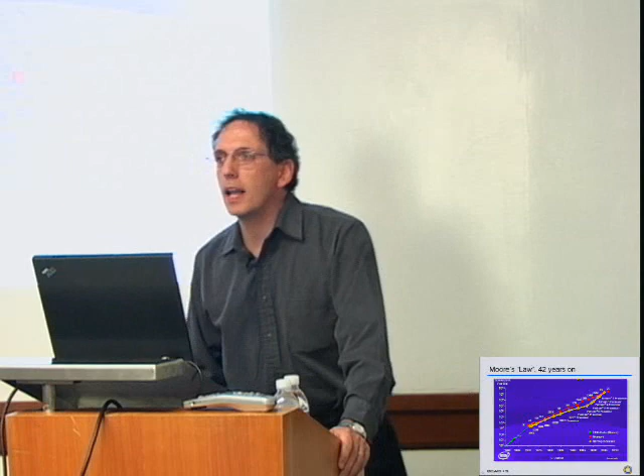And 5 years later, Moore from Intel looked back at these 5 green dots and said, hey, there is a law at play here. Things are really improving on a scale, so let's establish that. Remarkably, even though nobody is actually forcing or following this law, the industry followed pretty much that. And now we have cases where we have exceeded 1 billion transistors on a chip. This has been going on for more than 40 years.

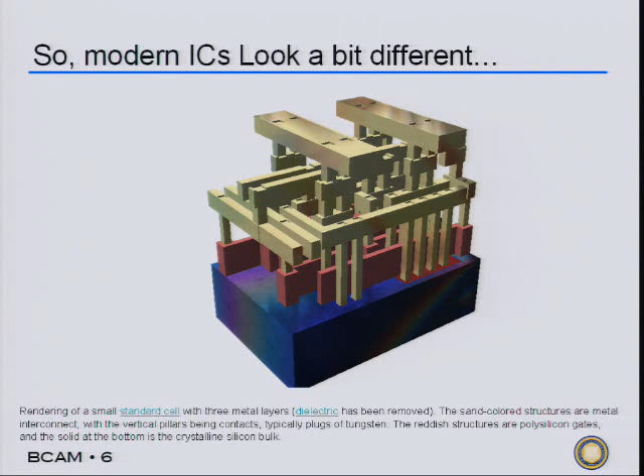And chips and integrated circuits look a little bit different than they used to look back in 1964. This is a standard cell. It shows some of the complexities you could face. You see the silicon substrate at the bottom, the transistor gates—there are many transistors here, maybe 20 or so. You see the contact holes, you see the interconnect, and some material has been removed in order to make this visible.

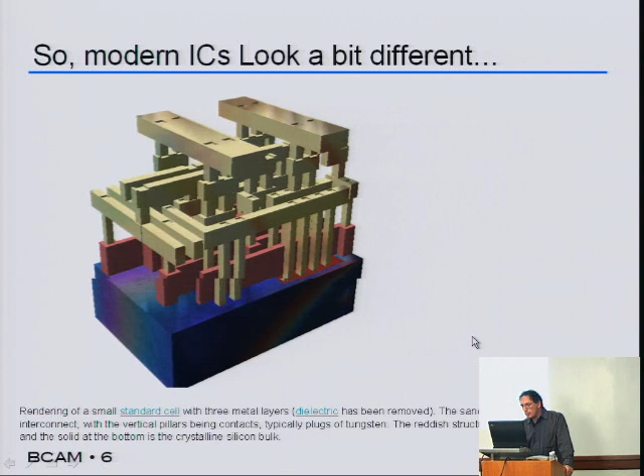If you indulge me, a comparison between what it is and what it was is kind of instructive, and I wanted to put them on the same scale. To do that you would have to grossly magnify what Kilby did 40 years ago. Let me make the generous assumption that this wire is 1/10 of a millimeter, maybe it was bigger at the time, so 100 microns. I will still have to magnify it because this little dot here, that perhaps you cannot see, represents the circuit. If I magnify it a little bit, maybe you can see it better. So you can see things have progressed tremendously.

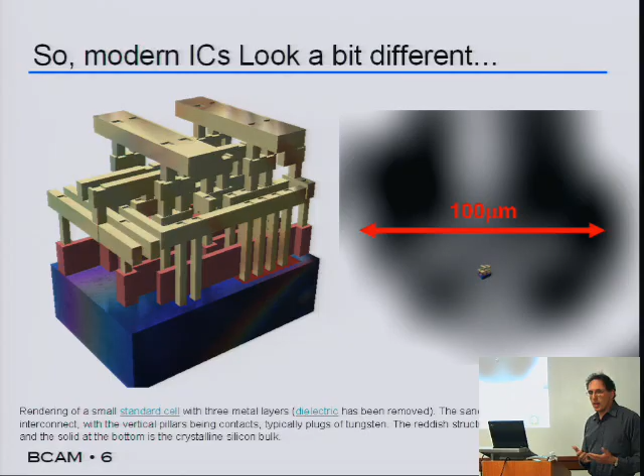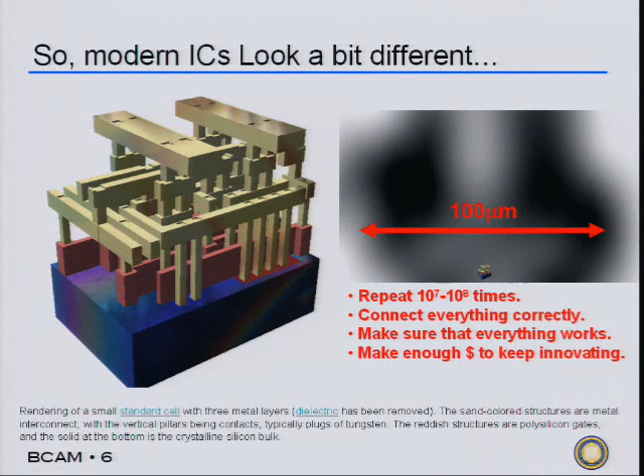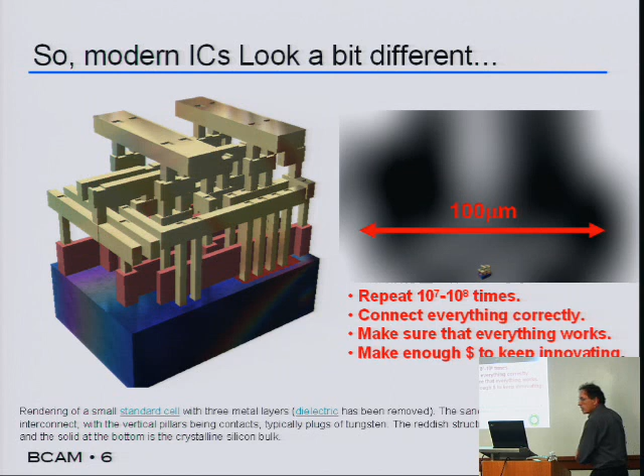And there are some challenges with that, because the moment you decrease the size of something to this, the real challenge begins. Remember that a real integrated circuit has 1 billion transistors, so you have to repeat this thing 100 million times, and make it flawlessly and connect it without any problems. Make sure everything works, and on top of it, you have to sell it for a few dollars and still make enough profit to invest in order to keep pushing the technology. To say that it is not easy is an understatement, but it has been happening with great regularity.

So in summary, if you go to past and present, the semiconductor industry follows different eras. In the beginning, in the 1960s, it was the novelty of the concept and the main patents and ideas that came about. Then people figured out a way to do it more effectively, so that was a technology revolution in the 1970s when they dropped the cost and consumer goods started coming out. At that time, they hit a wall because now you had an opportunity to design circuits with hundreds of thousands of transistors, so the design techniques had to change.

Design automation was necessary, so the design revolution happened in the 1980s or so, where most of these things became software products of industrial strength. Then, in the 1990s, people figured out how to really improve the efficiency of manufacturing.

They put controls in manufacturing, statistics, models and diagnostics, so manufacturing became very effective and costs continued to drop. Now we are in the 2000s, and people are looking for the next opportunity, what is next to push. This is what I would like to talk about. But the bottom line is that we cannot keep progressing by making things smaller anymore. You can do this for a little bit longer, but there are fundamental limits that we are approaching, and also economical limits.

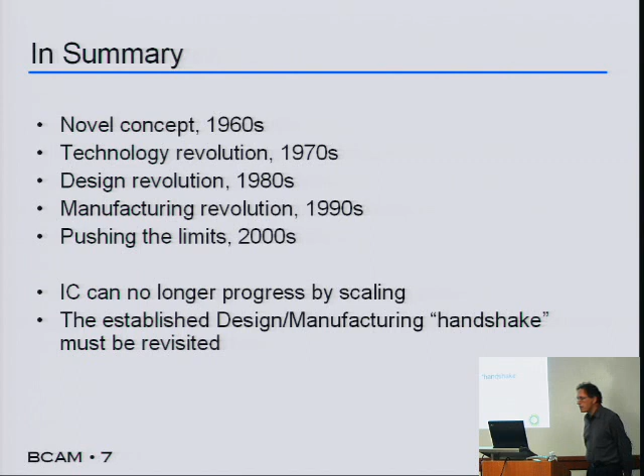The other thing is that the established design manufacturing handshake needs to be revised. So with that, I would like now to go a little bit deeper and tell you about this handshake, how it is today and how it has evolved over time. I will talk a little bit about the design automation and the design flow paradigm.

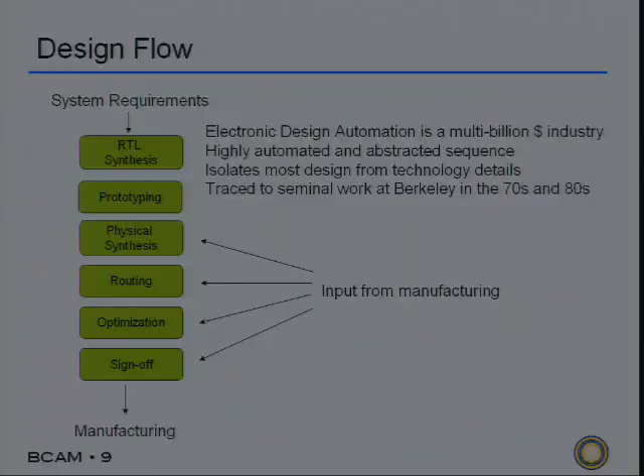The design flow essentially refers to the sequence of events that need to take place from the moment you get the requirements for a complicated integrated circuit product until you actually build it. The design flow has been highly automated thanks to the EDA industry, the electronic design automation industry. It's a multi-billion-dollar industry, mostly in the South Bay.

The emphasis of this is to highly abstract things, so people who design integrated circuits do not need to know much about the technology, because you need many more designers than people who build them. So people can push polygons, draw lines, and somebody else takes care of all the technological problems behind it. So there's a high level of abstraction, isolating most design from technology details.

And of course, it needs to be said that the whole electronic design automation revolution owes its genesis to UC Berkeley, to seminal work that happened here in the 1970s and 80s. People like Richard Newton, of course, played a huge role, and others.

You see the sequence here. You start with a very high level of abstraction, describing a microprocessor or a video driver. Then you synthesize this at a fairly high level of abstraction in what is known as register transfer level.

Then there is some prototyping. Now, don't fool yourself, this is not physical prototyping, it's still in the realm of simulation. Then there is the physical synthesis, where people start designing the shapes that are going to be printed. There is the routing, when things are connected together. Then there is optimization, and finally you create masks and give them to manufacturing.

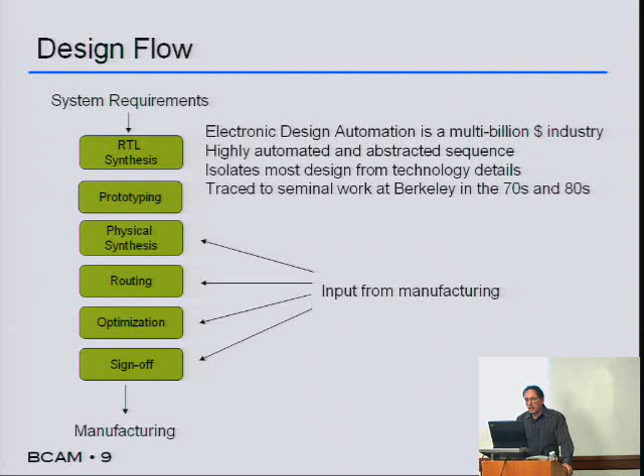And of course, in at least these last four steps, you have to have input from manufacturing to tell you what is possible to do. The form of this input is highly abstracted, and I would like to talk about that.

But I would like to tell you that there are fundamentally three communities in this transaction: the people who design the integrated circuits, the people who develop the new technologies and chemistries to actually make them, and the people who will actually have to make this in volume. So there is design, technology or process development, and manufacturing. Design and process development interact very closely in many cases, but at some point, things have to go down to manufacturing.

This was very ad hoc until the late 1970s, when a book came about: Introduction to VLSI Systems by Mead and Conway. Maybe you're too young to have seen it, but it's still on my desk, well worn out. This book introduced the concept of design rules.

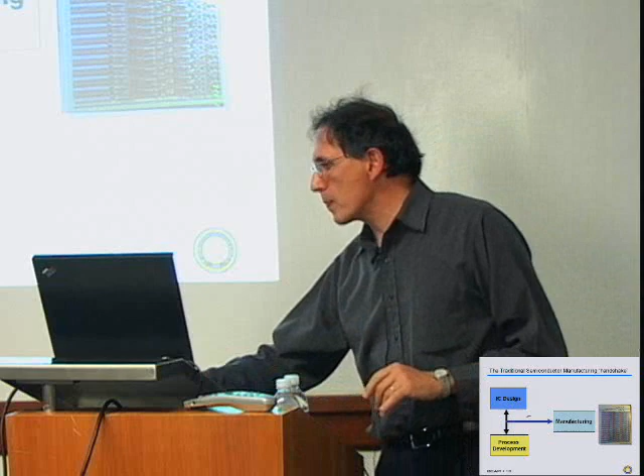Essentially, what it says is that perhaps the way to let designers know when something is feasible or not is to simplify it as much as possible and give them some basic dimensions they have to observe. If you observe these dimensions, we, the manufacturer, guarantee that the thing is going to be realizable. So all you have to worry about is making sure that electrically the thing is correct, and that you observe the fundamental dimensions, and it will be okay. These are known as the Mead and Conway design rules. It's a very simple concept.

If you're designing, if you as an electrical designer want to connect your aluminum layer, this is a cross-section, to some kind of a substrate, you have to cut a hole into the insulator and let the aluminum flow down. From the top, it looks like a hole cut on top of this resistive region.

So the design rules will tell you that if you want us to make this, make sure that you observe some minimum distances. Make sure that you do not get this contact hole too close to the edge, because there might be problems. There are uncertainties in production. And make sure you don't make this contact hole too small.

Notice that the term lambda shows up here. The reason people use this term lambda is because design rules are meant to be scalable. So I have a set of design rules, and I'll tell you that lambda is 1 micron. Tomorrow, if my process is better, then I'll tell you, it's the same design rules, but lambda now is 0.5 micron. So automatically, you can scale your design down. Everything is scaled into this lambda.

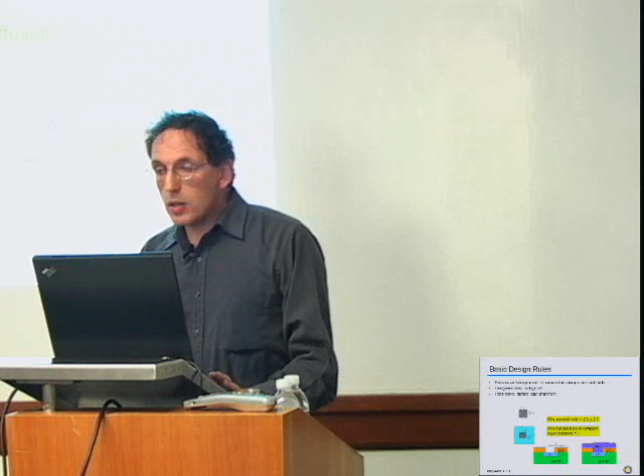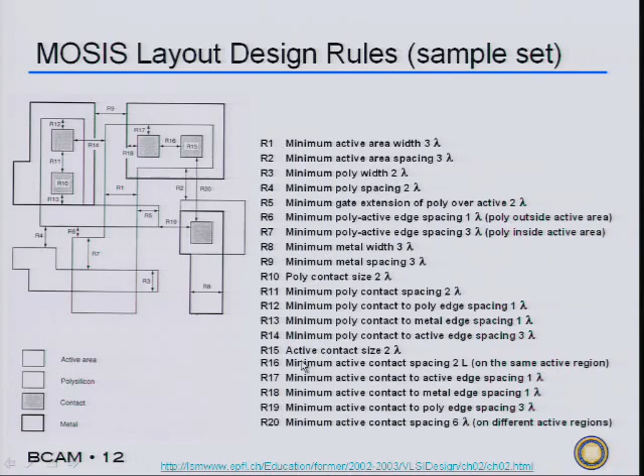The people who develop the design rules try to capture all the possible contingencies here on how these layers interact, and they generate a rule for each one of these contingencies. So notice that a simple interaction of a few layers generates a large number of rules. Now, all of them are scaled to lambda, and they can easily change.

But as the technologies advance, the number of rules you have to deal with has grown a lot. In a real process, you have to deal with a few thousand rules, and the rule book is as thick as a telephone book. And there are some other problems. As we move ahead, this top-down view of the design, where if you make sure that some distances are observed you're going to be OK, doesn't really describe the complexity. And some of this complexity now can come back and hurt the designer.

This is a cross-section of a relatively modern device. The source is from Intel. It is a 65 nanometer device, or a device at a 65 nanometer node. Node is a term the industry uses as they progress in scaling, moving from one node to another. As you can see in this cross-section, these little dots happen to be silicon atoms, and here, silicon dioxide molecules and silicon atoms underneath. The device size is comparable to the fundamental unit of atomic size.

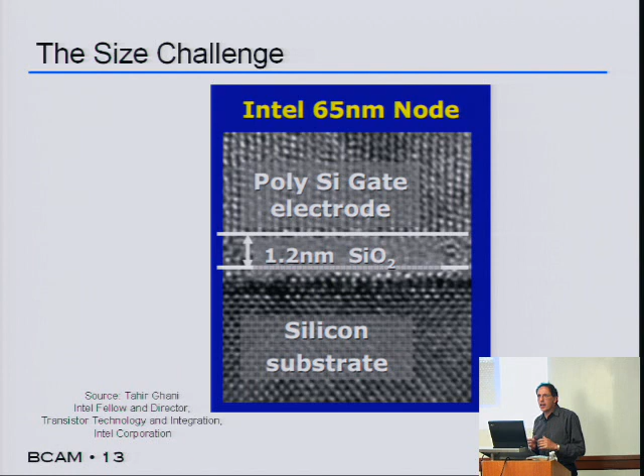So now you have to deal with issues that cannot be simplified so much by presenting simple dimensions. The other problem is that in the good old days, transistors were planar or flat. So a top view of a transistor like this will tell you where the source, the gate, and the drain are, and the channel, because all you could do is move things around from a two-dimensional world—it didn't quite matter to you. That was an abstraction you could live with.

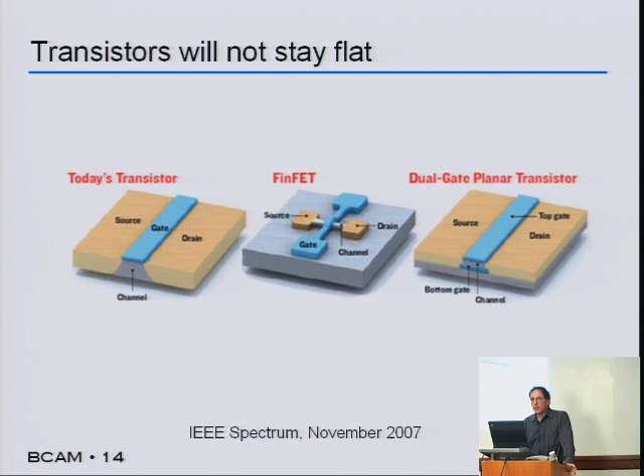Transistors will not stay flat. In fact, transistors have already moved into a situation where you have clear three-dimensional structures. And in some cases, people are talking about transistors where they go underneath the top layer, and you have another layer behind it. So with all these complexities, that's another view on the complexities. The reason I put this picture in is to make the point that a top-down view of a two-dimensional world where you can simply deal with lateral dimensions is not adequate anymore.

This is not a big problem because clearly rules are not being observed manually anymore. You don't design the layout and look it up in a book. You draw the layout, and like an automated spell checker, if you draw something that's not acceptable, it gets highlighted, and in many cases it gives you a suggestion of how to fix it. So that is okay. However, when you have thousands of rules, the performance of that spell checker suffers, so now it gets in the way of doing the design.

But if that was the whole problem, we would leave it alone. Unfortunately, it is not. In generating these thousands of design rules, we cannot guarantee that these rules are unique anymore, so you might have many rules that are redundant. You have a rule about this distance and a rule about this other distance, but in some context one rule might overshadow the other, so you have this inefficiency of having redundant rules.

But the biggest problem is that back in the old days, if you met the rules, your design was guaranteed. Unfortunately, that's no longer the case. So designers are asking, why should I go through all this pain of spell checking my layout, my design, if at the end you cannot guarantee that you can build it for me? What is the point? So there is a discussion between the communities now on how to deal with that.

So I just want to leave you with two messages. Design rules have grown to be very cumbersome, and design rules no longer capture the complexity of the process, so meeting them does not guarantee that things are going to work. So let's talk about that a little bit and how people are dealing with that.

So I would like to talk now about the design rule bottleneck, now that you know what design rules are. The bottleneck revolves around a few issues: variability, or maybe I should say uncertainty, hotspots, which is an interesting term I will define a little bit later, and patterning, that is creating a layout, creating a pattern that is at its theoretical limit. I will explain what that means.

The semiconductor industry is famous for being fairly organized, so they maintain what is known as the semiconductor roadmap. The roadmap is a document that the industry issues together every two years that essentially projects the future of technology. They tell everybody this is what we intend to do in the next 5, 10, 15, 20 years. It has different scales, so the roadmap is a very thick document because it deals with all the details of the technology, and it also explains why these changes are needed. And they use a convention when they project the future.

By the way, this is drawn across time, you see the years here. And there are different features here, different numbers that represent the features of technology. I will just focus your attention on one line.

This tells us that in 2005, the industry expects to be printing metal layers with a resolution of 90 nanometers, 90 billionths of a meter. And we expect that year after year we'll be reducing that, improving the resolution to 78, to 68, all the way to 32. Now, the industry uses the convention of using white when the solution is known, when we know how to do that, yellow when we have some ideas on how to do that, and red when we have no clue how to do that.

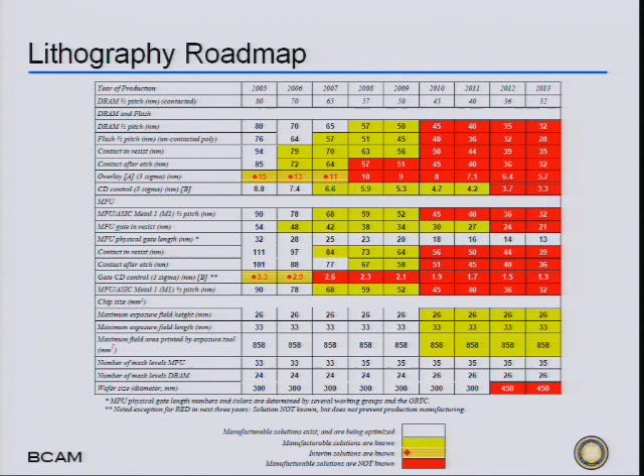So by taking a look, you see when the next problem is going to hit you. And you can see that, well, when it comes to controlling this thing with small variability, we are already in very shaky ground. And today, that roadmap is a year old. Today, we're in trouble, we don't know how to meet our goal. But anyway, this is what the industry tries to do. They try to map out everything very neatly, but there's quite a bit of a mess behind it trying to achieve it.

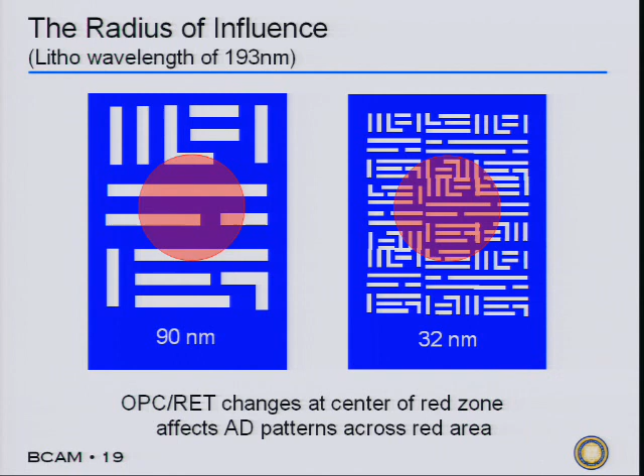I would like to focus on two numbers here: the objective that in 2005 the industry was printing things at 90 nanometers, and in 2013 we'll be doing things at 32 nanometers. That has a big implication. This is a kind of caricature of a layout, a 90 nanometer layout, and the same patterns are pretty much shrunk down to 32 nanometers, so they are smaller. Clearly you can see why the industry wants to do that—you can fit more stuff on the same area, more functionality, more transistors, and so on.

Imagine you're drawing this with a pen, the tip of the pen has the same thickness it's had before. The tip of the pen in this case is the wavelength of light that you use to print things, and this wavelength causes imperfections in the printing process, in the patterning process.

This circle essentially shows the radius of influence: if you change the layout anywhere within the circle, that change will impact the layout in the middle. So there is an interaction now. If you put another line there, the layout in the middle will change a little bit because things interact through the electromagnetic field while you're printing them down.

Now if you go to 32 nanometer, the radius of influence is the same, but now you have much more stuff in it. So you have much more stuff to worry about, many more interactions to worry about.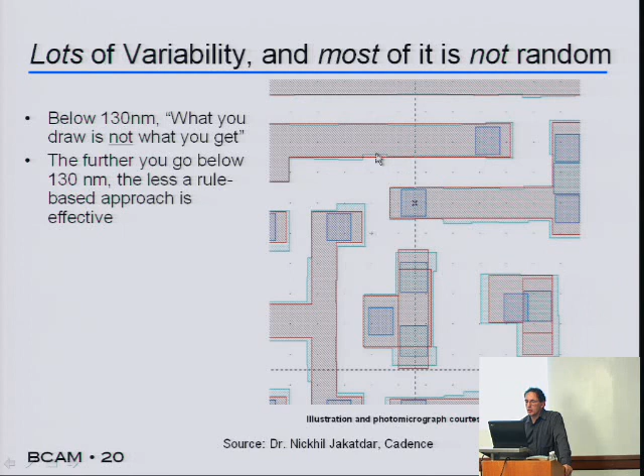Then some kind of automated software took this layout and changed it a little bit, made little changes in order to compensate for imperfections in the printing process. And then finally, one fine day you print it and see how it looks like. And this is a good result.

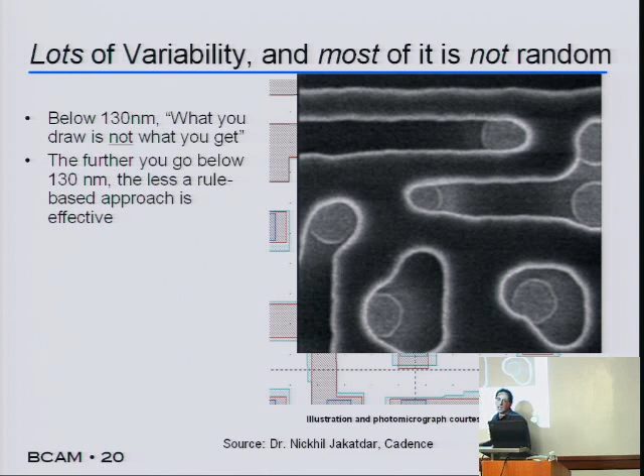The reason this is a good result is because nothing shorted out. All the contact holes that were square, by the way, now they are round. You cannot resolve the corners. But all the contact holes are in the right place, so this thing would electrically work. Now, there is such a difference between the simplistic view of the designer and the reality of making this thing that is giving us all the headaches.

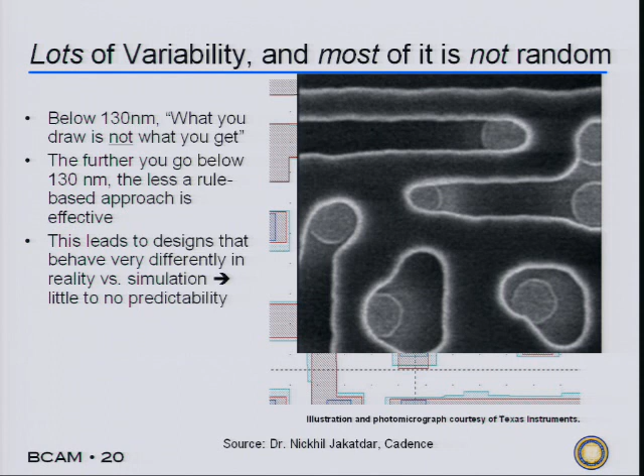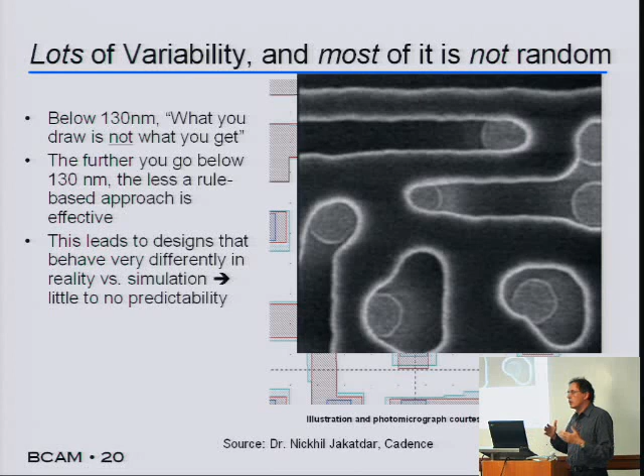So even though electrically this thing would work, its performance might be very different than the designer intended. The values of these resistors might be very different. It will vary from one time we print it to another, and so on. So you've got lots of variability, and variability comes in many flavors.

This is a real picture that shows polysilicon lines drawn next to each other. I put it there because I want you to notice that these lines are not smooth anymore. There is a roughness on the side. The roughness is because of the molecular structure of the photoresist material that we use in the patterning. So these big molecules leave fundamentally an imprint on the line underneath it. So you have to deal with that. That's a level of variability.

This is a picture of dimensions measured and plotted on a plot across a wafer, across a disk of silicon. You can see on the color scale here the size. All the sizes were meant to be the same, but they are very variable, as you can see.

Then there is the issue of proximity that surprises most people. This line is drawn exactly the same as this line. The only difference is that you have some patterns next to it here, while you do not have these patterns next to it. Well, the presence of a pattern in proximity makes a fundamental change, makes things differently.

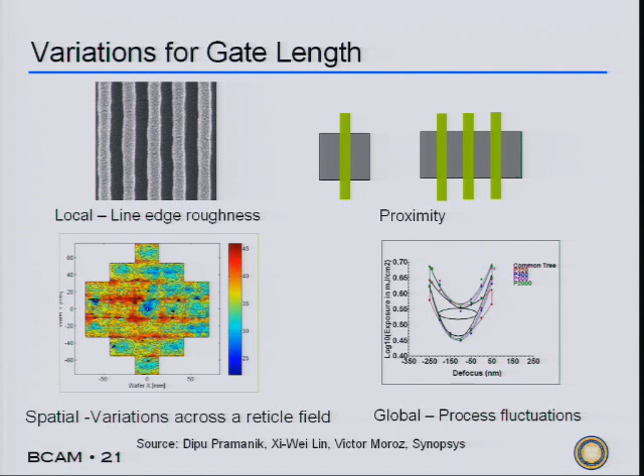And finally, when you deal with all this, you still have to remember that in a factory you're going to have day-to-day variability. Your machines are not going to operate the same way. The focus of your exposure tool is going to drift, and so on. So you have variability on very many different levels to deal with.

That's actually a very interesting result done by some folks in EECS, led by Professor Nikolic. This is an example where they made a chip whose whole purpose is to measure process variability. So they have a circuit here, repeated thousands of times in an array, and then they measure them to see how they spread out in performance.

And they played different games with the layout. The interesting thing here is to see the distribution of performance. The different colors that show up in grayscale correspond to different chips, because they made different chips. Each chip had its own distribution—there's the dark one here, the next to it, and so on. So there is a spread chip to chip, and then there is a spread within the chip.

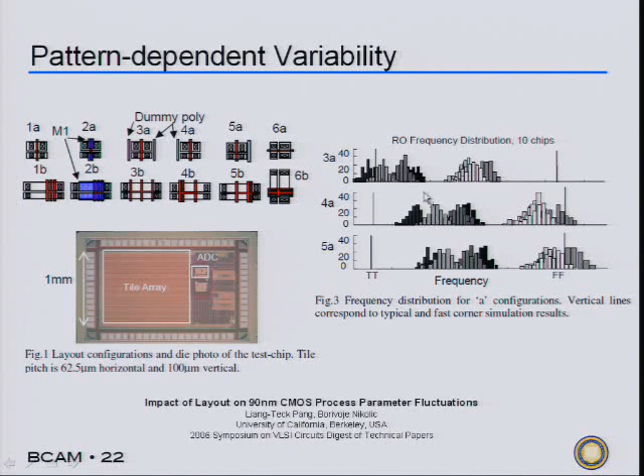This spread depends a lot on whether there's another pattern next to the pattern you're making. So I'm building a circuit, making it run, and measuring its performance. Then I lay another wire next to it—this wire doesn't touch my circuit, has nothing to do with it. But its presence alone, because things are at the atomic level, will change the performance of my circuit, since 'next to' in this case means a few billionths of a meter. Even though it's not electrically connected, it makes a difference.

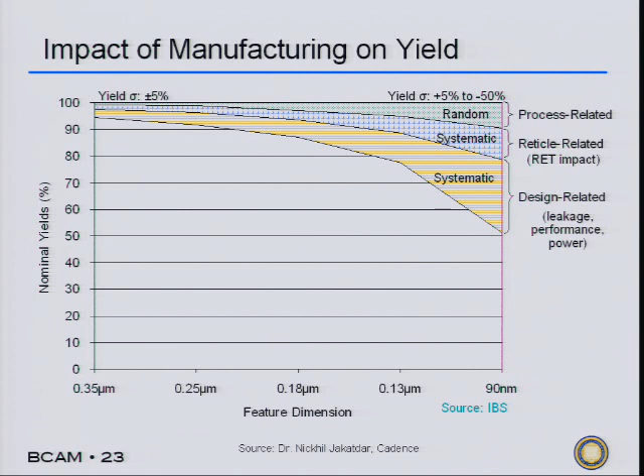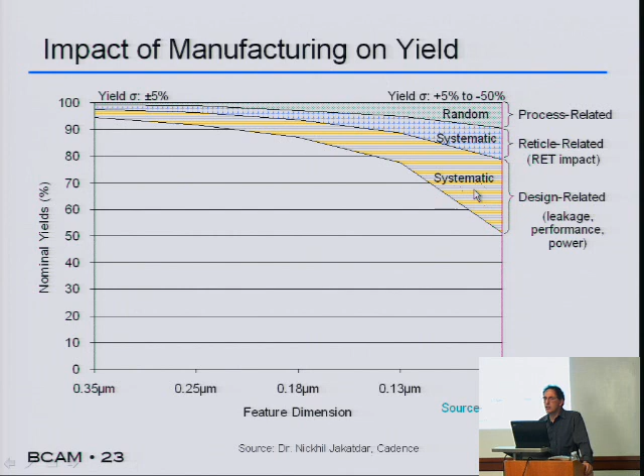So people are discovering that things are not so easy anymore. They might have been easier in the past, but as the technology gets smaller and smaller, you lose yield—you lose a percentage of devices you could have sold for money. You lose them because of all these types of variability. Some of it is random, some is systematic but patterning related, and some is systematic but related to the performance of your circuit. So people must do something about that.

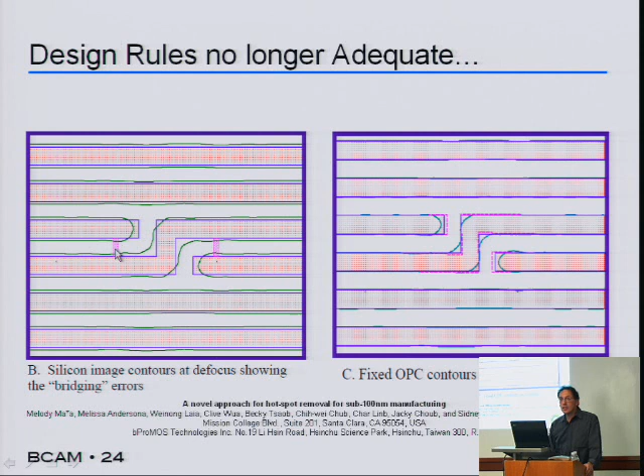Another example explains more directly why design rules don't work anymore. The layout on the left—just look at the straight lines for now, not the curved ones—met all the design rules; nothing objected to it. But when people did a simulation to see how the real layout would look, these green rough lines appeared next to it. Notice this end of the line isn't square anymore, and this corner is kind of rounded. They figured out that in this particular instance, things get too close. So here's a case that meets the design rules, but when you simulate its performance, it tells you this thing is not going to be manufacturable.

This is known as a hotspot—meaning you go through the layout, find all these cases through simulation, and mark them down as spots that are going to give problems. Then you have to do something about it, and people are working on many techniques to find hotspots, and many heuristics not only to find them—since you might find a million of them in a layout—but to automatically clean them or reduce their temperature, as they say, by modifying the layout locally. That's something the designer doesn't want to do because it's so tedious; you'd have to do it a million times on the layout.

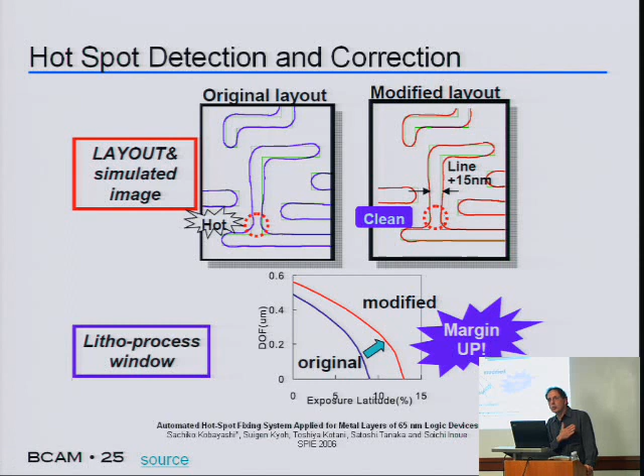A final challenge—there are many, I'm just picking a few. When you print things in photolithography, there's a fundamental limit. If your optics are absolutely perfect, no distortion whatsoever, your light source is perfect, your photoresist has excellent performance, there's still a fundamental limit. It's known as the Rayleigh limit, and it tells you that the size of the feature you want to print is proportional to the wavelength you're using, lambda, divided by the numerical aperture, multiplied by a factor known as K1, or the difficulty factor. Lambda, in our case, is about 200 nanometers—200 billionths of a meter.

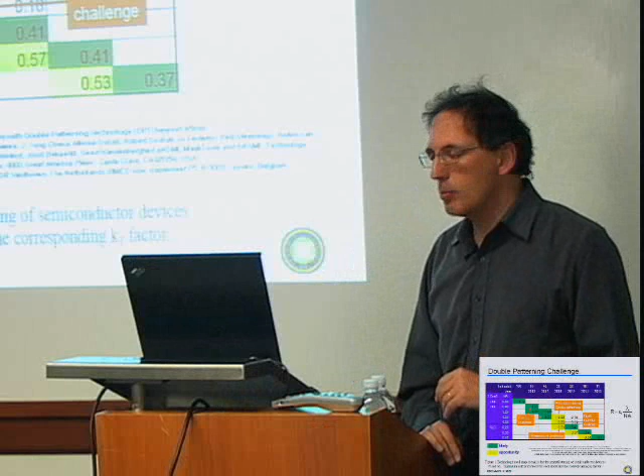It's way below what is visible, but that's what the industry is using—193 nanometers to be precise. The numerical aperture, for those of you into photography, cannot be more than 1; it can approach 1 with great difficulty, but cannot exceed it unless you play some really tricky games. And K1, for reasons beyond this presentation, cannot be smaller than 0.25—there's a theoretical limit there. You simply cannot print when K1 is below 0.25. So people put all these things together and say, okay, here we are. This is the table: we'd like to print 100 nanometers, 65, 45, 32, 22, 16, and 11—these are the years we intend to do that.

Okay, let's see what technology you have available. If lambda is 248 nanometers, maybe you can do 100 nanometers, but beyond that you cannot. So then we have to move to a different laser source and go to 193 nanometers.

Then you can play with numerical aperture. The biggest we can do is around 0.9. But if we take the whole thing and immerse it in water, we play a trick with refractive indices, and we can game the system into thinking the numerical aperture is bigger. Now you have a very complex photolithographic system immersed in water, with a numerical aperture of 1.2, 1.35. To go to 1.55, you have to immerse it into something even more exotic than water. So it becomes very complex.

And then we have to go and play what is known as extreme ultraviolet lithography, where essentially you play with X-rays. People don't want to do that yet—it's super expensive, as in, each system that does this costs $50 million. So they are not ready to go there yet.

Anyway, 193 nanometers is the workhorse, and you can see here the K1 factor getting very close to the theoretical limit, and at 32 nanometers it hits it. That means you cannot do it. So you have an option: go to this exotic X-ray kind of source, or play another trick.

And the trick people play is they say, wait a minute, maybe I can take my layout and split it into two components. I can print these easily, because the pitch is very wide, and I can print that easily too, and if I print them on top of each other, then I've managed to cheat and double my pitch and double my density. This is known as double patterning.

It sounds difficult, and in reality it's much more difficult than it sounds. It is almost impossible to align. As designers, you have to deal with where the layout is going to be cut off, because it might have electrical implications. And then, of course, in the end you have to measure the whole thing to make sure it came out correctly. But that's another problem that design rules absolutely do not capture.

But as we try to make things faster and smaller, we find it necessary to keep introducing new elements, and now essentially cover a good chunk of the periodic table. So it's not silicon anymore. Yes, silicon is a big thing, but there are many other things you have to worry about, each one bringing problems with repeatability, cleanliness, and so on.

The problem with lithography is that the wavelength of light has been reduced, but the things we try to print reduce even faster than that. So now we're still stuck at 193 nanometers, but we're printing 45 nanometer things. So you have to do double patterning, immersion lithography, aggressive optical proximity correction—a big mess. There's an industry that thrives down here providing these solutions, by the way.

And then, of course, as you know, semiconductors have been built in clean rooms because you need them to be clean. If you have any defects on them, these defects, compared to the size of the things you're doing, are huge—it's going to damage what you do. Our ability to keep things clean has bottomed out.

It has bottomed out because back in the good old days, we only had to care about defects in the size of about a micron—huge defects. But now that you're down to 45 nanometers, you have to worry about defects that are much, much smaller. And guess what? These are very difficult to regulate.

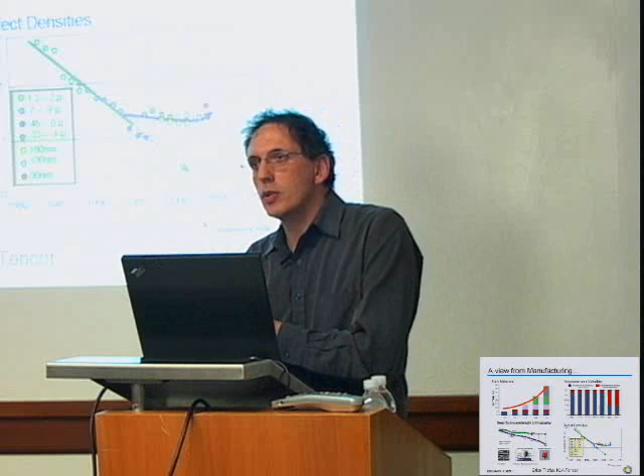So as you can see, at about 1995, we started living with environments that are now inherently dirty, because at that level, we cannot clean them anymore.

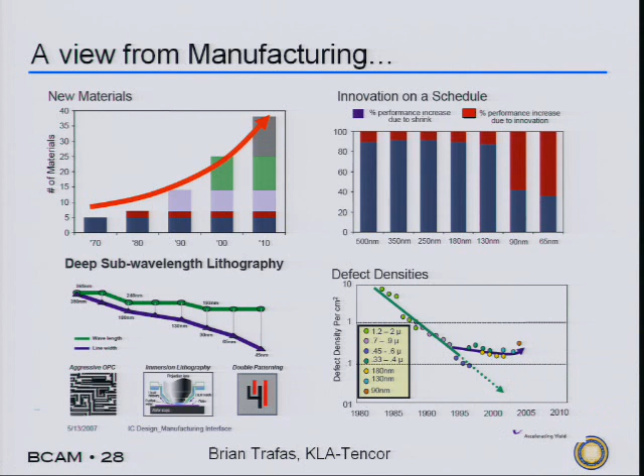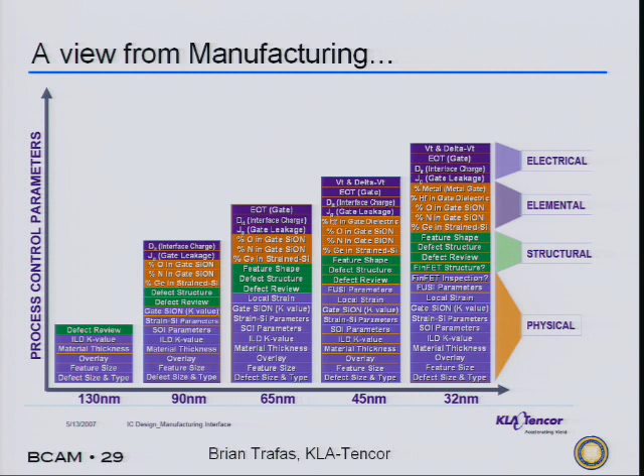Now, if you happen to be in the metrology business, making equipment to measure things like KLA Tencor, and if you happen to have a near monopoly on that, then you will be extremely happy, because back then they only had to measure a few things in the lab to sell a few tools. But now they're going to do very well, because there are so many more things that need to be controlled.

Final picture. Is it time to end the revolution? This picture might suggest that. There are lots of pressures here, and I would like to focus on the financial pressures.

The increasing R&D costs: for 180 nanometers, you could develop a new technology with a few million dollars. For 45 nanometers, you need $500 million to do it. If you wanted to build a new fab, a few million dollars would do it back then. Now you need multiple billions of dollars. And by the way, consumers are expecting new products very, very frequently.

For example, if you're making DVD players, the life cycle of the product is less than a year these days. So they expect innovation, right? So you have to keep coming up with new products. So is it time to stop the revolution?

The answer is no. There are ways to move forward. And I'll give you some examples of how to do that as I close my talk.

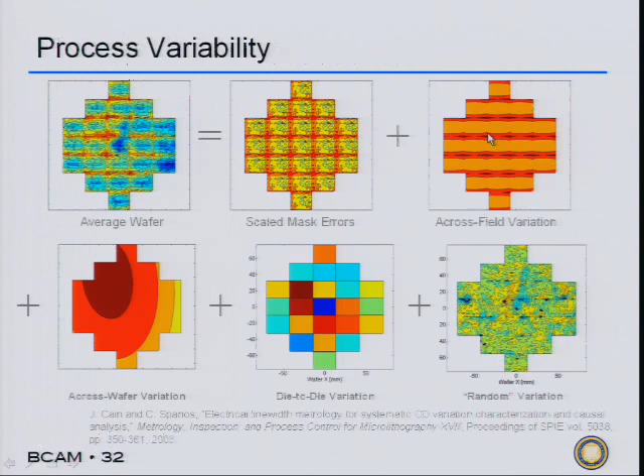Process variability might be a huge problem, but it can be modeled and codified. This is an example where you see the variability of some dimension across the wafer, and this can be broken down to different levels of abstraction: variability across the mask, across the photolithographic field, across the wafer, due to the photolithography equipment, and some random component.

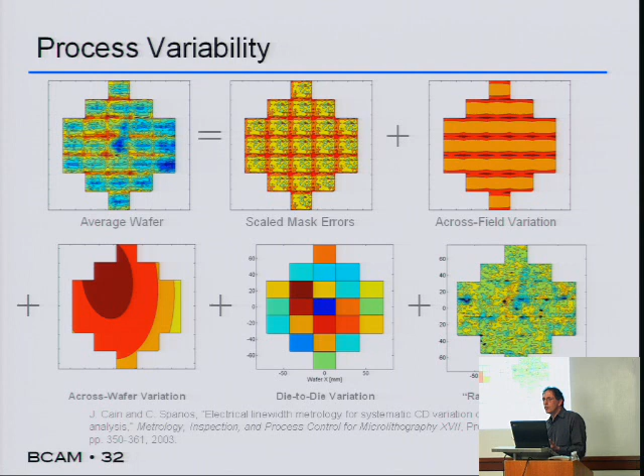So variability has both random and deterministic components. All you need to know is to measure them and codify them in a way that you can put them in automated tools. This is a simple example of how this can be done.

So if you were to describe it, you have to build models that describe the variability of the layout as a function of what is around it. Okay? That is now well established.

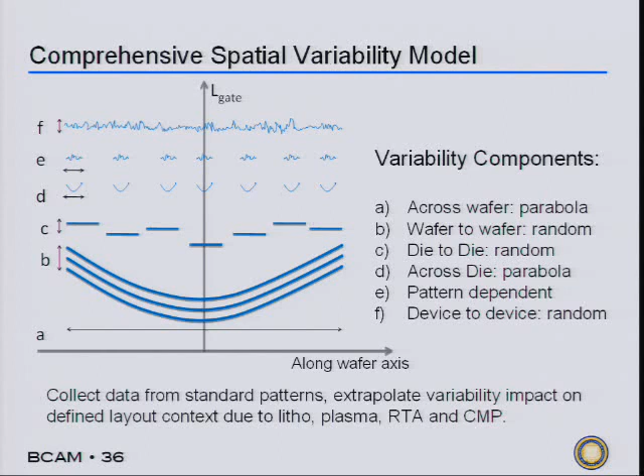The variability model is hierarchical. You have to have components to tell you what is happening across the wafer. This is a one-dimensional view of a wafer — I didn't want to complicate it too much. So this is the center, and this is the edge of the wafer.

From wafer to wafer, you might have a standard deterministic pattern, and as you go from one wafer to the other, this pattern might change — random variability wafer to wafer. From one exposure field to the next, you might have some variability, and others as well, including the pattern-dependent variability.

What can you do with it? If you have this information — and by the way, we do have it in some of our test processes here at Berkeley — you can do what is known as statistical design.

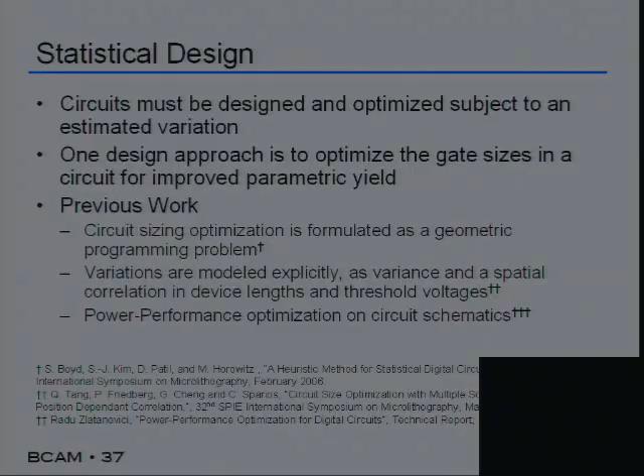Statistical design is not a very complicated process. What you do is: if you ask me to make a circuit, I can optimize its performance as a designer. But I will optimize its performance thinking that this circuit is going to be produced as a big statistical distribution, so I will be optimizing the moments of that distribution.

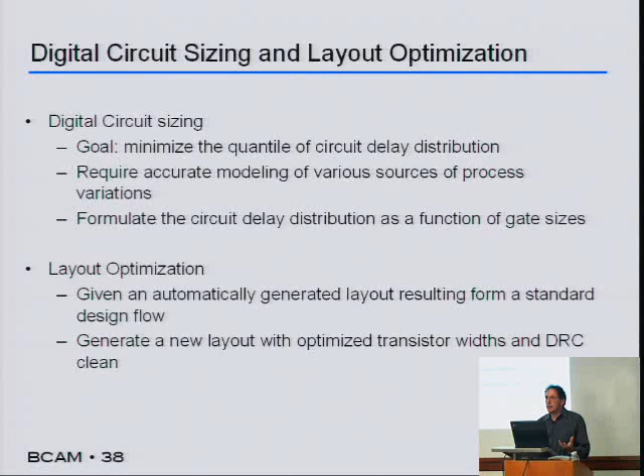That involves circuit sizing, which I will not go into, and layout optimization. I just want to go to these few equations in this presentation, which show that this can be done fairly simply.

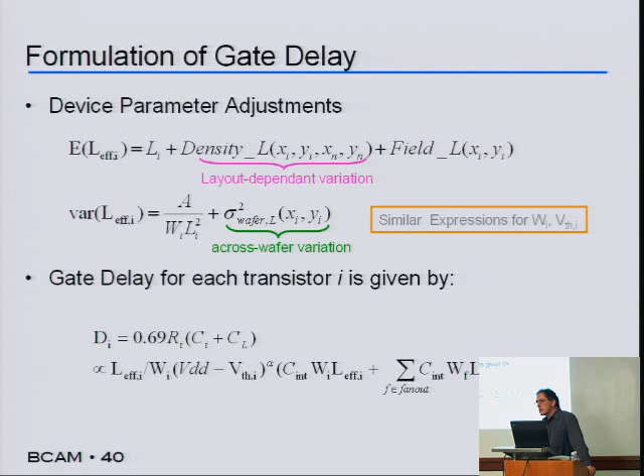For all its complexity, an integrated circuit is nothing more than a sequence of switches, resistors, and capacitors. There's much more to it than that, right? But you can simplify it to the point that you turn a transistor on, and when you turn it on, it sends a signal, and the signal has to go through a resistor and charge a capacitor.

And then from that point on, it has to go to another one of these stages, and another one, and another one, in what is known as a critical path, to send a signal a large distance across a circuit. So in this critical path, you can perhaps optimize its performance by changing the length and the width of the transistors. And you do it in a way that what you optimize is the statistical distribution of the performance rather than the fixed value of the performance.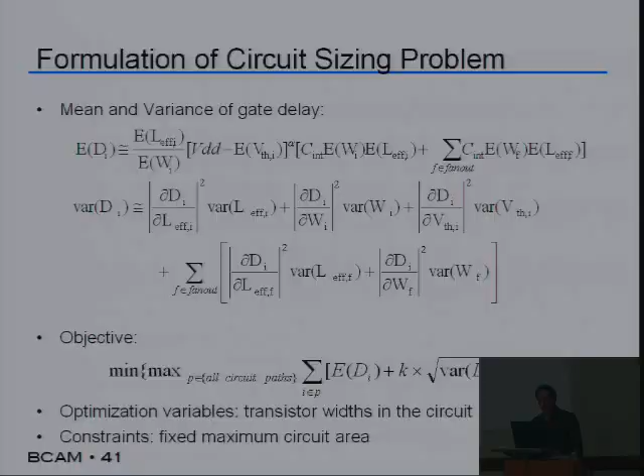So it's a simple model, this example. Simple models can be cast into a nonlinear optimization problem with a surprisingly manageable number of parameters for all the sizes that you're talking about. Just go to the punchline, and the results can be quite encouraging.

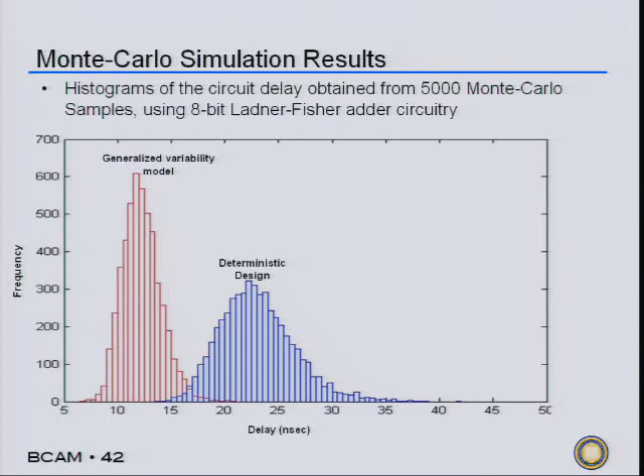These are simulated results, simulating the variability of the process. This assumes that I build a large number of simple products, shown here in blue. It's the performance of the product that was optimized without understanding the variability of the process, the so-called deterministic design. And the other one here is the one that actually took advantage of the variability of the process, the so-called statistical design, or the generalized variability model.

Now, we make things to be fast, so speed was at issue here. We want to make things that are fast while they observe some other performance constraints. And you can see here statistically, even though you might find a few examples where the optimized product will give you things that are slower than the deterministic product, statistically, the optimized product does much, much better.

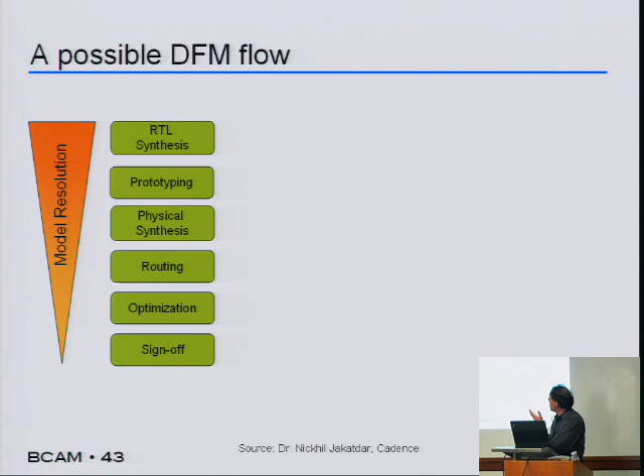All right, so go back to the design flow as I conclude my talk. That is really an opportunity to change that design flow. So you have the synthesis, the prototyping, the routing, the optimization, and the sign-off. And at some point, you have to take into account what is happening in manufacturing, not just by taking design rules, but by being able to simulate what is going to happen and optimize against that simulation.

And this simulation has to be statistical in nature, a Monte Carlo kind of simulation. That means that this model has to be very fast because you have to run it many, many times, and this is part of the challenge. That's what we're trying to do, and actually quite a bit of the industry is moving in that direction.

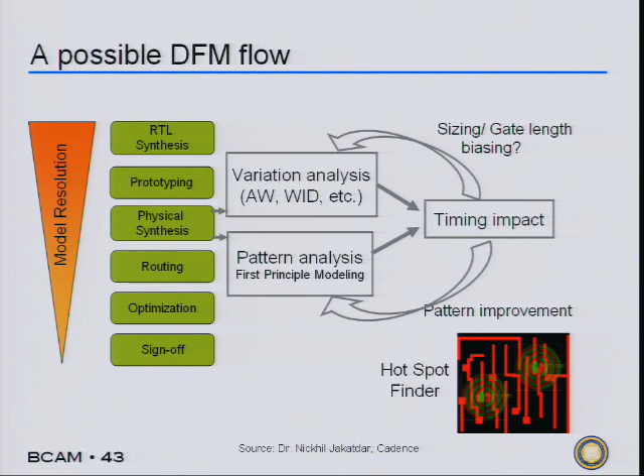And it is these feedback loops that you see here that make our life difficult. Because you have to design something that is very complex, a billion transistors. You have to simulate it, that takes a lot of time. And then you have to go around and do it many, many times while you're tweaking things here and there. And this is the big research problem that we'll try to address.

Faster, accurate simulation. Design rules are changing as well. People are used to having just a design rule set that no longer guarantees yield. Well, guess what? Now people say, OK, we'll give you two sets. There are the design rules that you have to follow. If you don't, all hell is going to break loose. But here are some recommended rules. You are highly encouraged to follow those as well, because this will guarantee the yield that the basic rules cannot guarantee. Why have two sets?

Because the recommended rules are much more complex in nature, and you don't want to mess with them unless you have a high-end product in mind that you really have to hit a high performance.

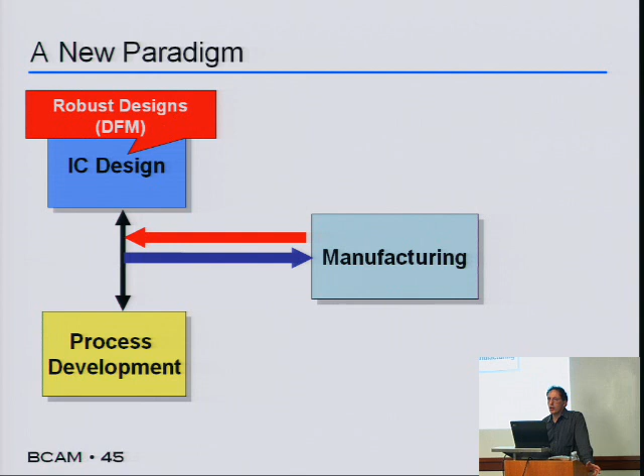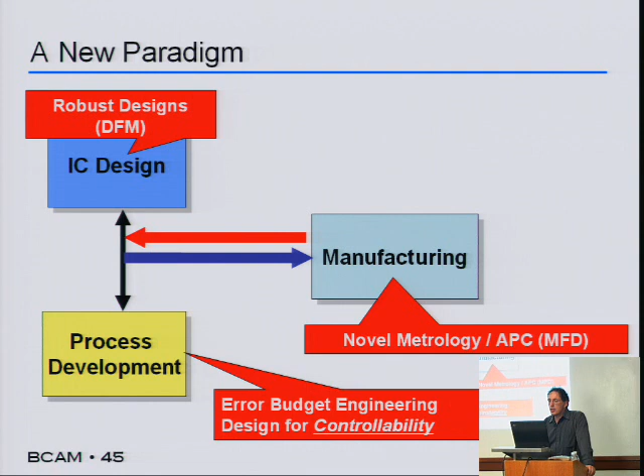So the paradigm is changing. It's getting more complex. Manufacturing now talks back. And yes, IC designers are working on so-called robust designs, or designs that are immune to variability. Process development people care a lot about controllability that they didn't used to. And there's quite a bit of novel metrology and manufacturing for design techniques, MFD, happening on the production line. But the biggest thing is that manufacturing now has to communicate many, many more things than they used to: flexible design rules, variability models, first principle manufacturability models, hotspot libraries, and so on.

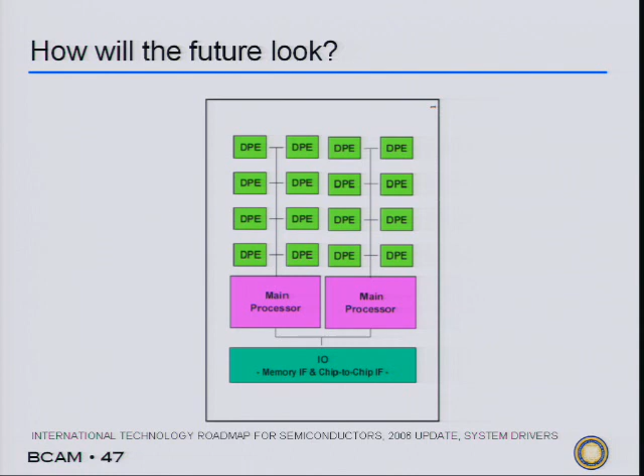Industry thinks that the architecture of integrated circuits is going to change fundamentally. So this is an integrated circuit, but it's going to have multiple processors and many data processing engines like video drivers and whatever. Many. So you have this modular architecture.

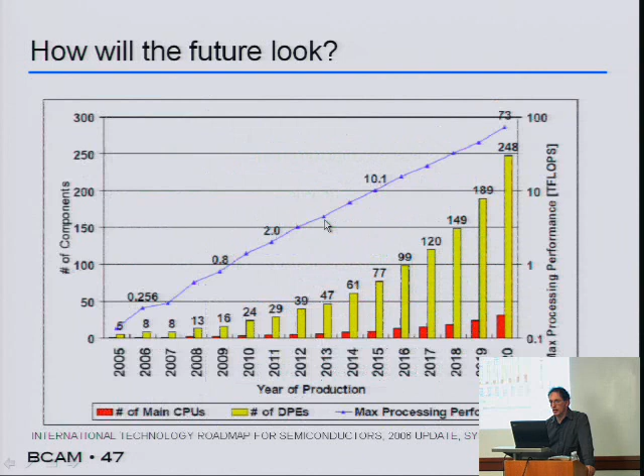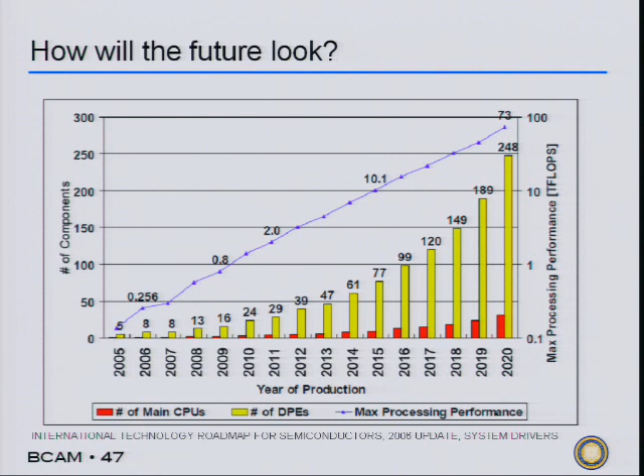So 73 teraflops. But the interesting thing is how they expect to do it: by capitalizing on this architecture where you're going to have multiple processors and many more of these modules. This, by the way, presents a way to beat Moore's law, to keep Moore's law going. There's no good reason to keep all these processors on the same stack of silicon anymore. They're hybrid techniques, so you can build smaller things and bring them together at the end, even though there are huge challenges in doing that as well. But that's another way things might go.

Finally, I'd like to close by bragging a little about the overall work we were doing and planning at Berkeley and the University of California in general. Our target is facilitating all these things at 32 and 22 nanometer nodes, where technologies are going to be already quite exotic, both in lithography and in the required computation and modeling. So you see the tools that are going to be necessary.

We do this by assembling a good team of faculty under our capable leader, Professor Kameshwar Poolla, who I do not see here today, even though I promised him free lunch. But anyway, Professor Poolla pulled this team together, and I'm proud to be one of them.

I'd like you to notice this is a very multidisciplinary team: people who do fundamental modeling down at the equipment level, people who do design flow at a very high level, people who develop new devices, people who understand lithography, people who understand planarization, and so on. It's necessary because the problem is indeed multidisciplinary. And I'd like you to notice these people come not only from UC Berkeley, but also from UCLA and UC San Diego, and many different departments.

The problems we try to solve - first, you don't always get what you want. What Kameshwar meant is that you print something that looks neat on a layout and it looks absolutely different when you actually print it. How do you solve this problem? By modeling the heck out of it. So there's going to be quite a bit of effort on that.

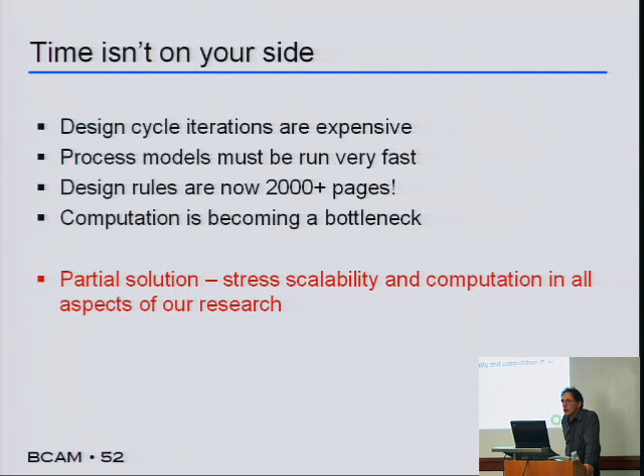And this is the structure we put together. So you have people working on fundamental studies to understand how the technology is moving - next generation lithography, next generation planarization, and so on - to make sure we can model these techniques effectively.

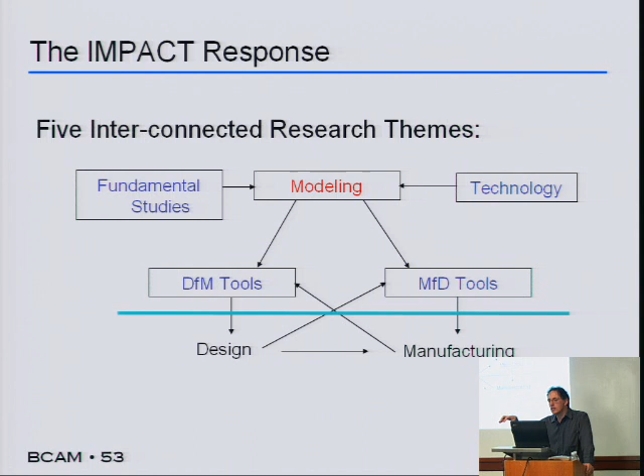And we deliver what's known as DFM tools - design for manufacturing tools that are used by the designers. And MFD tools, the mirror image - manufacturing for design. Even though my focus is on the design side today, people in manufacturing need to know more and more about what the designer intended to do. They're not just printing something blindly; they need to understand what the designer is trying to do. So there are many tools needed to capture that as well.

Now, to do this, you cannot do it in a vacuum. You have to bring together a team that does it every day, and the team has to come from industry. So we assembled a team of companies that is co-funding our project and mentoring this project. We have, of course, the big vertically integrated companies - the companies that do design, manufacturing, and process development.

We brought in companies that do heavy-duty design and have somebody else build it, like Marvell and SanDisk. These are the people that actually suffer quite a bit from this interface because they do not control manufacturing. They have to send things to Taiwan and to China, and they expect that what they design is going to be manufacturable. We have to bring in foundries.

By the way, this is a program to be funded by the state of California, so we're limited to companies that have bases in California. Or else you would have seen TSMC and Chartered and many other companies here that have a very big interest in joining. And of course, you have to bring the design automation industry, the people who do all this big industrial scale design automation software. And you have to bring in the suppliers, people who make the lithographic machines, the etchers, the metrology tools, the chemicals, the masks, and so on. So you have an ecosystem that I think is quite complete and quite diverse that will be working together in the next 4 years.

Just to repeat the key message, innovation is great. It's going to keep on going on, I think, but its mode is going to change. Primarily the interactions between design and manufacturing are going to change. And I think that we're in a very good position to play a key role in that. Thank you.

Thanks, Costas, for a great talk. We have time for some questions. If anyone has any, raise your hands high. I know it was completely clear to me, so aha.

Costas, you focused on manufacturing, I guess, your area. But there is currently also another dimension to this puzzle, right? There are lots of people looking at totally different devices for various reasons. What do you see? How do you think that's going to play into the evolution of semiconductor technology? That's actually an excellent question. People are talking—Professor Hu coined the term post-silicon electronics, where not only do you have different devices, but you have so many other materials, and you try to bring them together on different substrates.

I don't think this is going to change the paradigm or the main thrust of what we are worrying about. At some fundamental level, people have to design against these new devices. And at some fundamental level, there has to be a contract between people who design and people who build. New devices are not going to make the problem simpler—I think they're going to make it more complex. So techniques of capturing that manufacturing complexity have to be strengthened there as well.